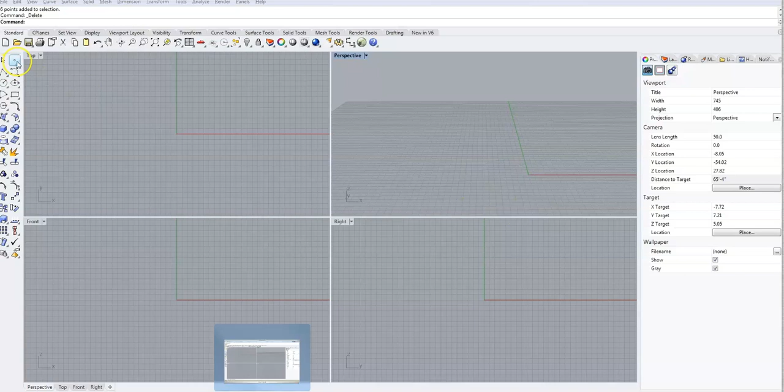Okay, so we're going to start with a few basic points, and we want to build a height guide for our project today. I'm just going to start with creating a few points here, and I'm going to take this point and alt click it up 3 units. Oh wow, that was wrong, oops, try again, I forgot to alt click. There we go, alt click, and wow, is that 3 units? That seems really high, but I guess that's right.

You know what, we'll go with it, let's do it, we're building towers today, so why not. And then the next one, another alt click and 3 up from there, and let's get crazy and go for another one, up 3 from there, and why not just go for broke here. Let me get one more alt click up in the air, getting it done. Okay, so that looks good.

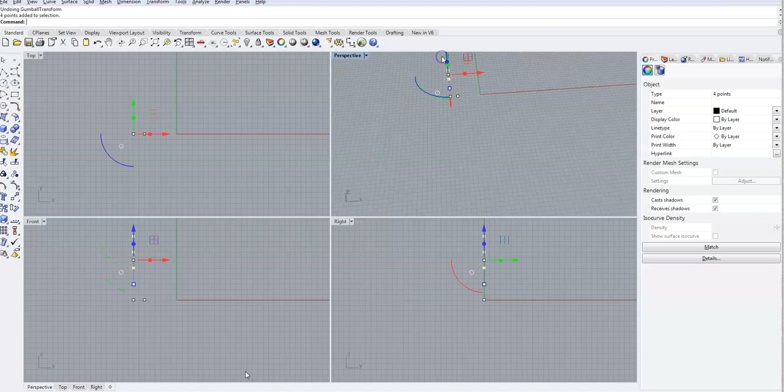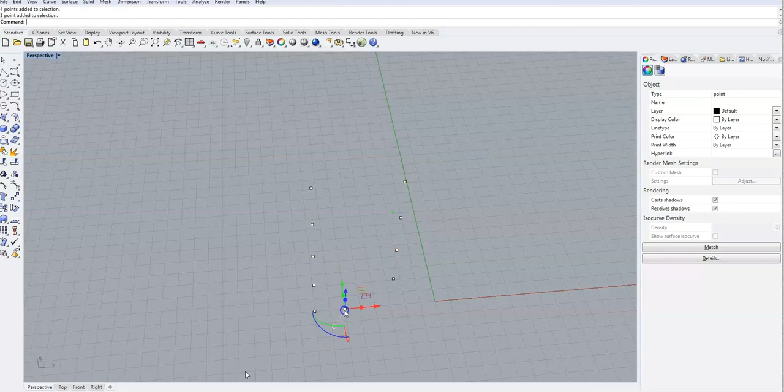I like the way that looks, and what I want to do is maybe take all of these points and I'm going to alt click those. Just let's go into perspective mode. Who am I kidding here, I need more space, and we'll take these 4 and alt click those maybe 5 units away. I don't know, should we go with 3? Let's go with 5, yeah, that's good, I like that. And then we'll have to move this one over, so let's just move him over 3 so he lines up with all the others. Alright, cool, there we go.

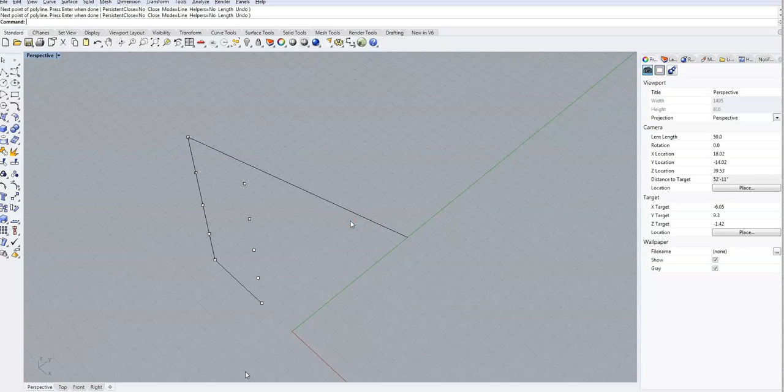And I'm gonna go grab a polyline, and we're going to snap a little polyline up here and over here, and then to this point here, and I'm going to snap it, and then, uh-oh. Oh no, oh gosh, I knew it, I blew it. Alright, let's try that again, happens to the best of us, boys. Alright, let's try it again. We're going to snap a line there, up to the top, and now I'm going to zoom in a little bit so I make sure I'm on that point, and hit enter.

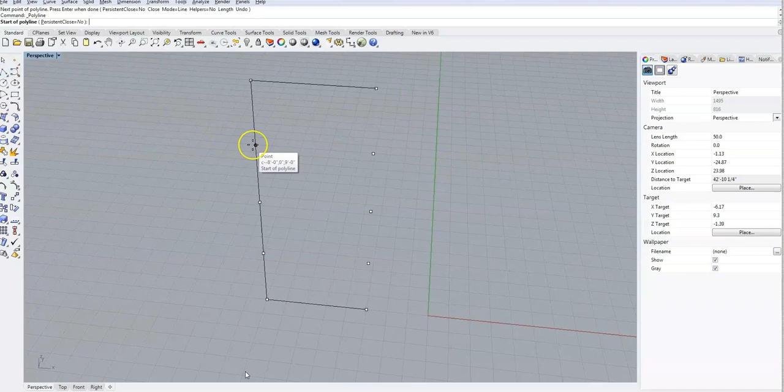There we go, this is just a little guide that we're going to use, this is going to help us out later when we're building our towers. In each of these, I'm just going to make one line and hit enter. And of course, I can just hit spacebar here too, because I'm making polylines. If you're doing the same thing that you did before, you don't necessarily have to hit the command, you could just spacebar it, and bang, our height guide is complete. I like the way that looks.

Good, alright, so we're going to be building some towers here, and the first tower that we're going to use - not this tower, this is the first one we're going to build - they call this the Torso, just because of the way it looks sort of like a human torso twisting. And this is, I believe, this tower is in Sweden. I have never seen it myself with my own eyes, but I like the tower, it looks kind of cool, right? So we're going to try to build something similar to that.

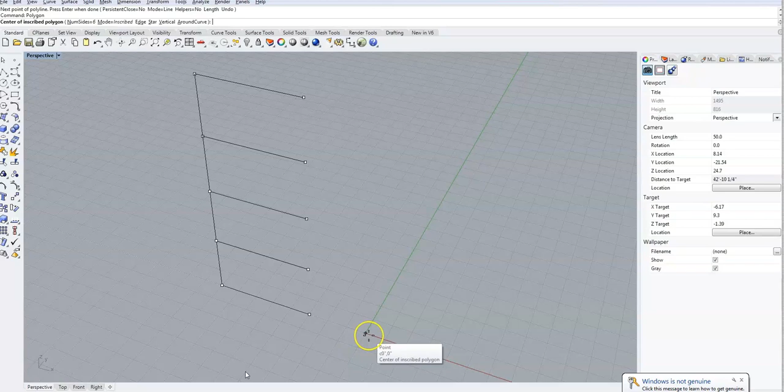And so the way that we're going to do that is by typing in polygon, and the polygon command wants to know where do we want to make the center of the polygon, so we'll create a point and then drag it out. Oh wait a minute, I really would rather have a 5-sided polygon. Let me see if I can change this to 5 here and see - no, oh wait, I think it got all screwed up, it's not doing it. Happens once again to the best of us.

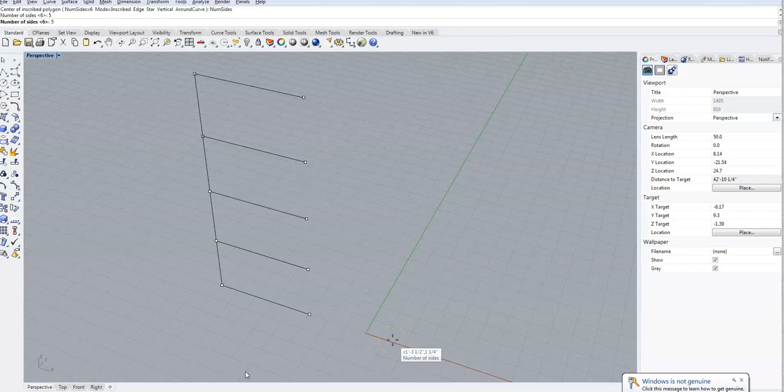Let's try again, polygon, and this time we're going to change this first to 5 before we start drawing the polygon. That was my mistake before, I started drawing the polygon and then tried to change the number of the sides, that didn't work. So we'll find a nice center point for it, and then we'll click and drag out our polygon, our 5-sided polygon, and we click to drop it in, and there we go.

Now we want to copy that. So there's - we know we can do that with the alt copy, but what I'm going to do is I'm going to select the curve and then type in copy, and it wants to know where I want to copy it from, and whether I want to go vertical. I do want to go vertical, so I need to change that to yes. Where's the point that I want to copy this from? That's what it's asking me here, so I'm going to click on any one of these points.

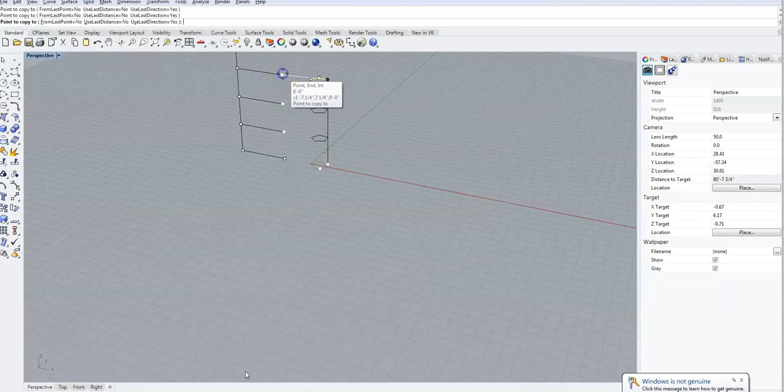Really would do the trick, we'll choose this one, and click on that, and then it wants to know where you want to copy it to, and I can line it up with my guide here and click that, and then click that, and zoom out, and click that, and zoom out, and click there at the very tippy top, and look what I've got there.

I've got a nice tower of polygons. That's a nice little method for copying it out, especially if we want a bunch of towers all the same size. That's why I made the height guide.

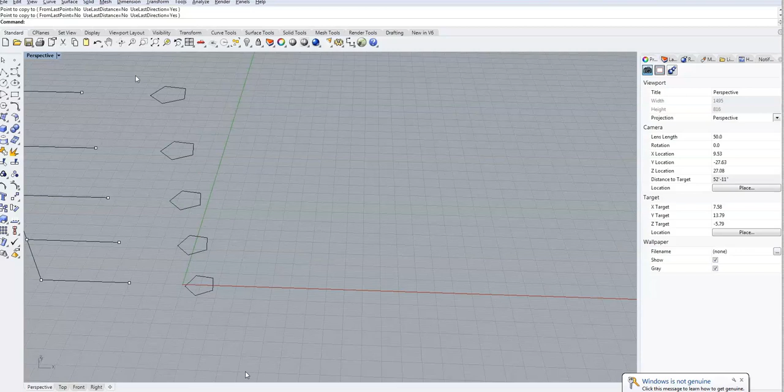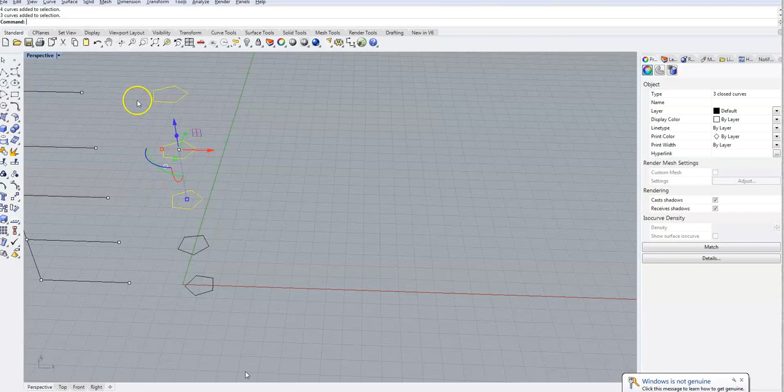Now I'm going to select my polygons, and I want to offset them each set. I'll click on my blue rotational guide, which rotates around the z-axis, and type in 20 degrees, then select the next 3 and rotate that 20, then the last 2 and rotate it again 20, and finally the last one, rotate it at 20. We get this nice set of polygons that are all twisting at 20 degrees each time we move up another level.

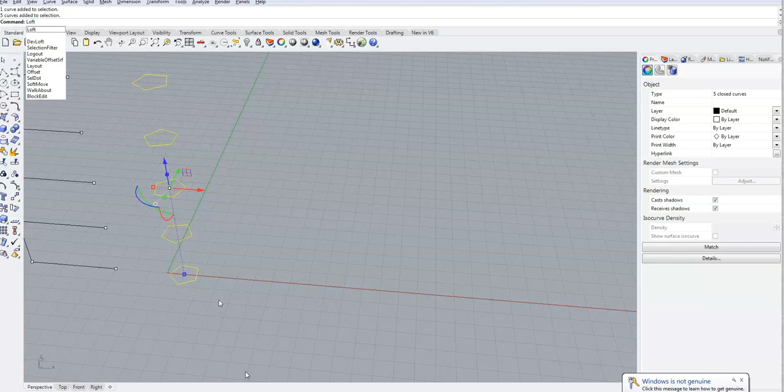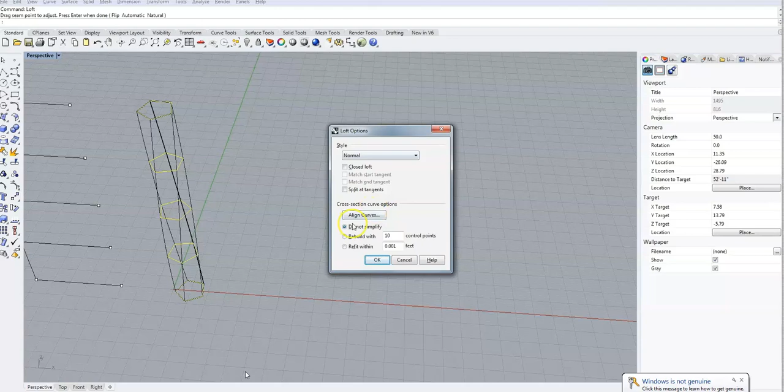Now we're going to use the Loft command, which we haven't done before. When you highlight all the polygons and type in the Loft command, you get this rail that attaches all of the shapes and these arrows that show the direction it's going to flow from. We don't need to mess with that, we can just hit enter and say OK, and then we've got this really cool twisty tower.

I'm going to shade that in so you can see it a little bit better. Cool, right? Check that out. That's looking pretty cool. Maybe not exactly like the building in Sweden, but it's the same basic concept, a twisting polygon. The one in Sweden has more levels to it, but this will do.

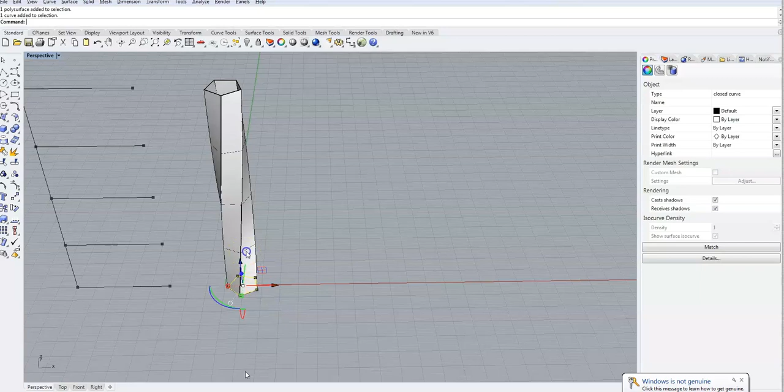What I want to do is get the curves from this and use them to make another tower right next to this. I'm trying to select just the curves, but it's difficult to select the curves without selecting the shape. I'm clicking, and I don't even know if this is actually accepting these. Turns out it's not.

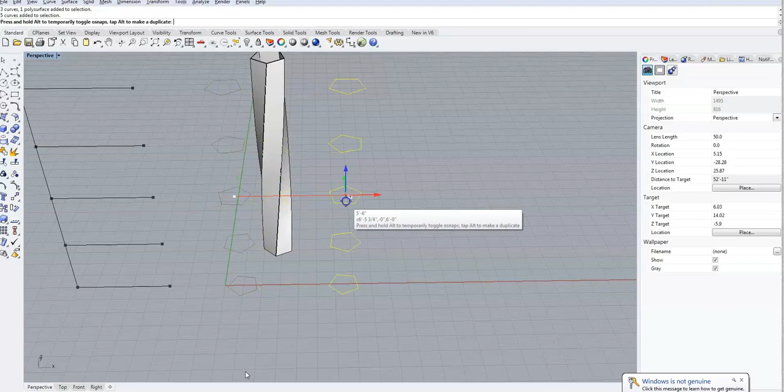So let me just move the tower out of the way, and I'll just take the polygons. We want to select this probably from the bottom. Select all those, and then I can alt-drag this so I get the polygons over here, and I can build another tower. Then this guy can go back where he was.

He doesn't really want to snap there, so let's use the move tool. Type in move, and then I'm going to click the point I want to move it from and the point I want to move it to, and bang, it snaps it right into place.

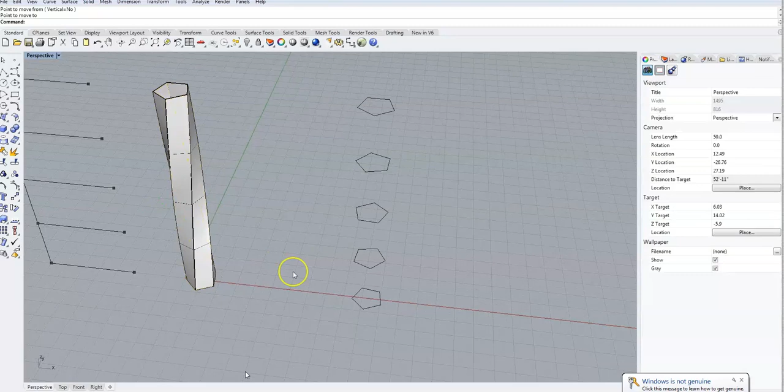Okay, so I've got another stack of polygons here, and this time I want to use a tool we haven't used yet. It's also new to you. The Loft tool is cool, we saw what that does. Let me resize this so you can see the whole window a little bit better.

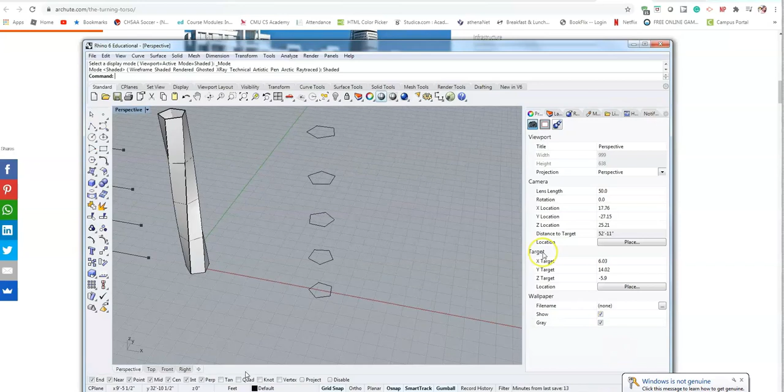Okay, down here at the bottom, I want to make sure that's in the view. There we go, that's better. We want to click on this record history button. The record history button is a command that only basically works for one command at a time, and then it shuts itself off, unless I right click on it and choose always record history.

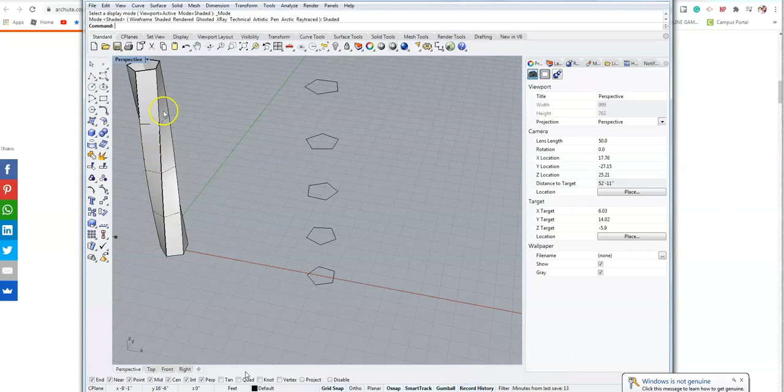So I don't necessarily want to do that all the time. I'm going to enable record history, select all the polygons, and loft just like we did before, hit enter, and I've got my loft tower. I say OK, just like the last one we made. Looks very similar.

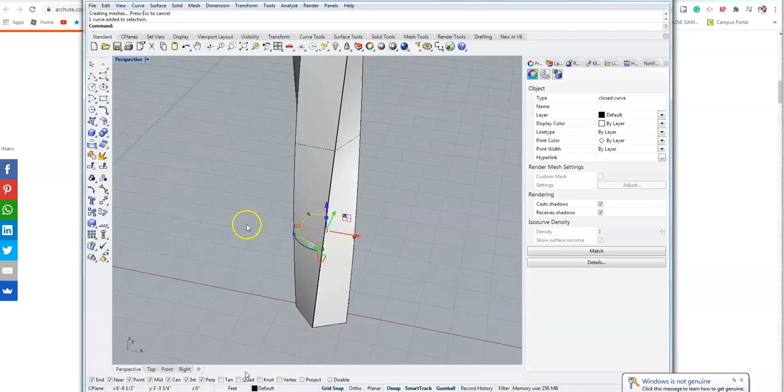But the cool thing about it now is that, because I had that on, you can see record history is now turned off, right, since it only works for one command. But now I can actually go in here and twist these and modify where these polygons are, and the shape, like memory foam, wants to do what I'm telling it to do. It wants to snap to the new locations. Look at that, I'm able to almost do some sculpture here.

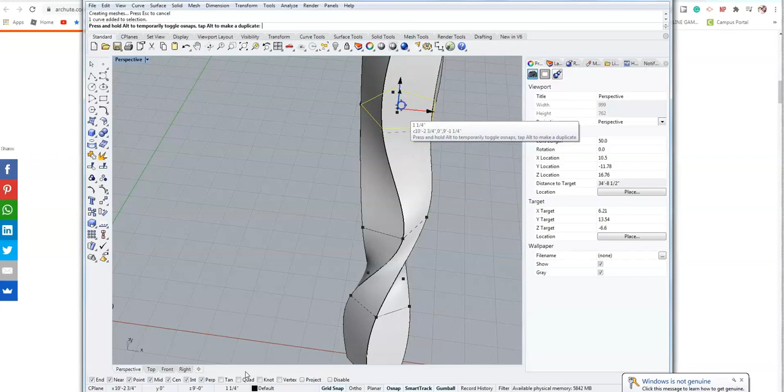This is the way you sculpt in Rhino, and I can move these polygons up or down, and you can see that works. Let's say we take the top one and make it a little bit bigger, maybe widen the mouth at the top, so almost like a vase. That's kind of cool, that works, and everything adjusts as I do it.

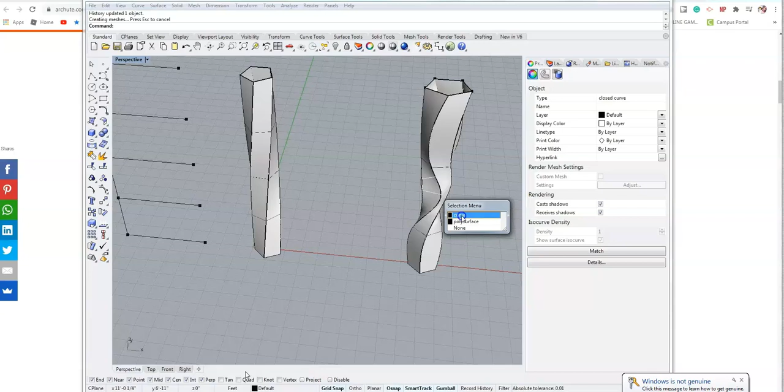I can even, let's see, let's take this one at the bottom here, select it and move it off to the side, see what we get there. Boom. It's really kind of a neat sculpting tool. That record history tool works great in combination with the Loft.